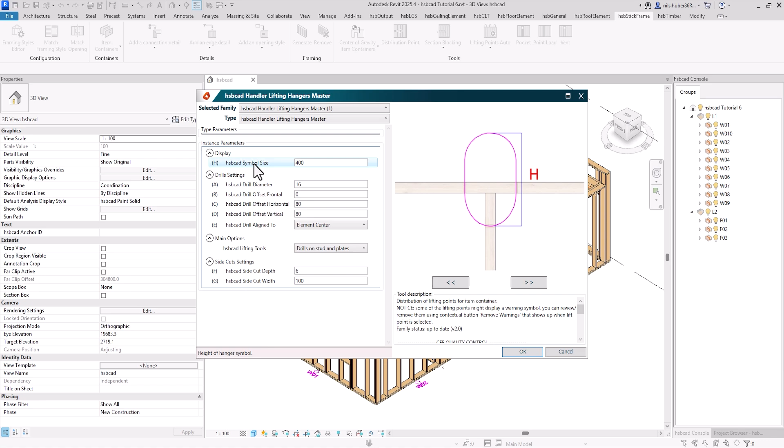So in the Setup tab, you can at first change the symbol size. By clicking on each parameter, you get a visual display of the parameter on the right side. We'll leave the symbol size as it is. The drill diameter defines the diameter of the drills. The frontal offset is the offset of the drill from the alignment.

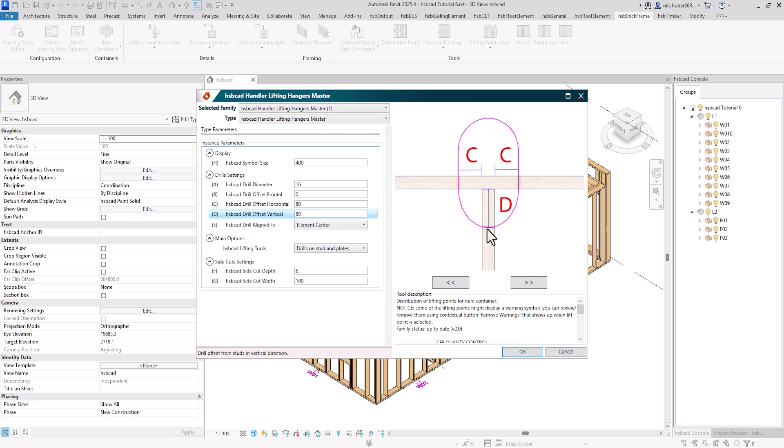The horizontal offset of the drill is the offset from the edges of the stud in the top plate. And the vertical offset is the offset of the drill and the stud. And this offset starts from the lower edge of the bottom of the top plate and goes down in the stud. Furthermore, you can set up the drill alignment. You can either align it to the element center, to the beam center, or to the top plate center. We're using the element center for that one.

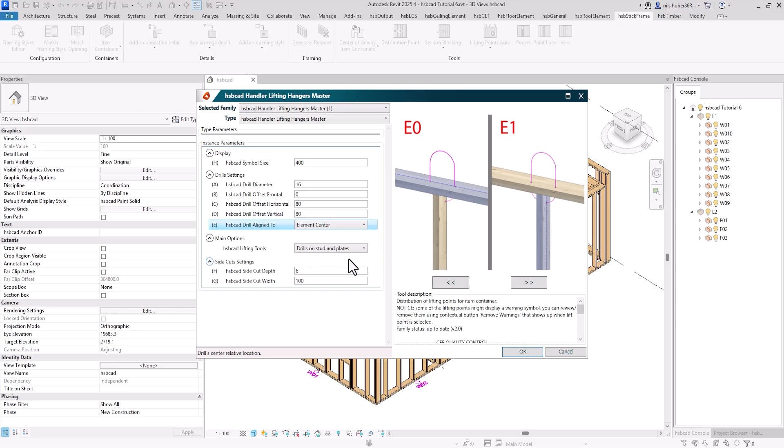On here, you have to select the lifting tools. You can either have drills on stud and plates, you can have a drill on the stud only, you can have cuts on both sides of the plates, or you can have no tooling at all. Right now, we're using drills on studs and plates. As we're using drills right now, we don't need the cut setup down here. But you could set up the cut depth and the cut width.

After clicking OK, you're asked to select the item container for which you want to create the lifting points. So right now, we do it for that one. And after we select the item container, we click Finish. So as you can see, the lifting points have now been inserted as tools, as handler tools, but the drills haven't been generated. In order to do this, you have to select the item container and generate it. Right now, the drills have been added right here.

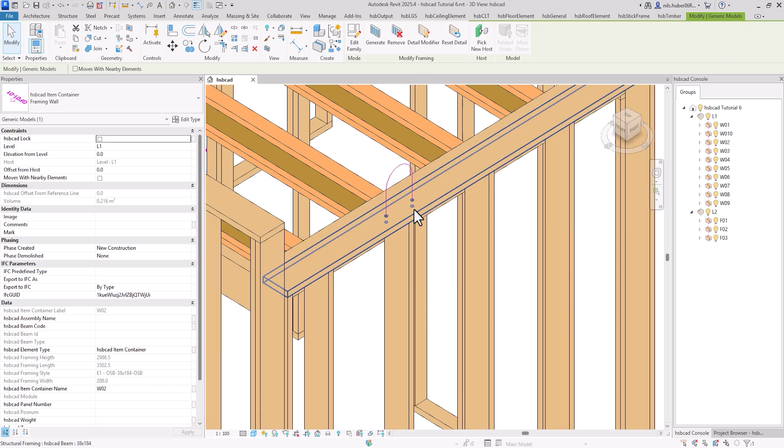When selecting the handler tool, you could move it and it will jump to the next stud. But as you can see, you would have to regenerate the item container in order to get the drills visible. So we regenerate it. And as you can see, because we have no handler tool here, the drills are gone and moved over to that point.

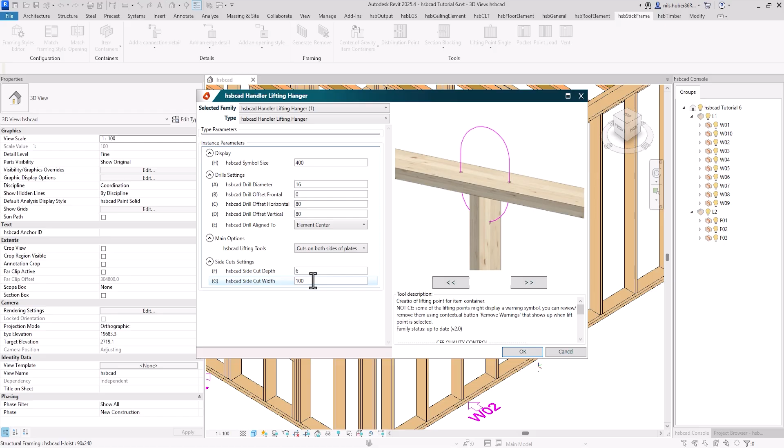You can, furthermore, add single lifting points. For this one, we'll use the cuts on both sides of plates. We're using a cut depth of 6 mm and a cut width of 100 mm. And after clicking OK, you need to select the item container, and afterwards, the location.

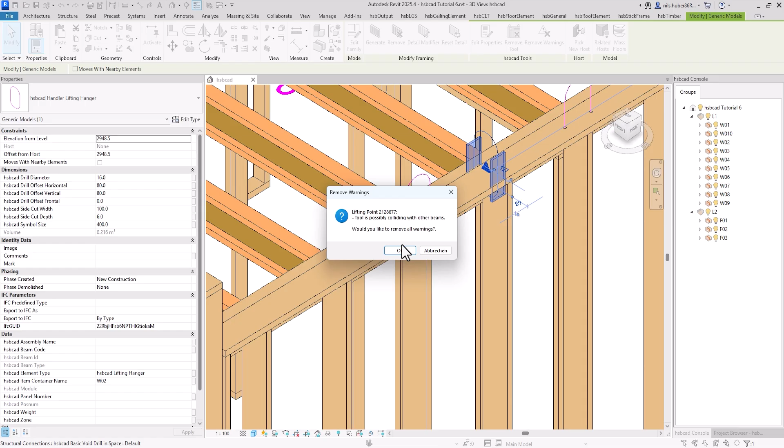So as you can see, right now, I'm getting a warning here. So when I select this handler tool, I can click on Remove Warning, and I get what the warning is about. So we're possibly colliding with other beams. That makes sense, because we are having cuts, and we placed it on top of the stud. So after clicking OK, the warning is removed.

And I can move it over here, so we don't interfere with the stud. Afterwards, I have to regenerate the item container again to get the construction. And right now, we're having cuts on both sides of the top plate.

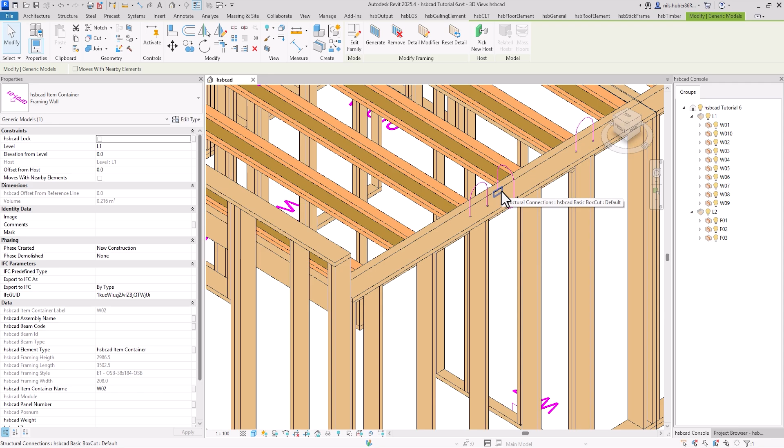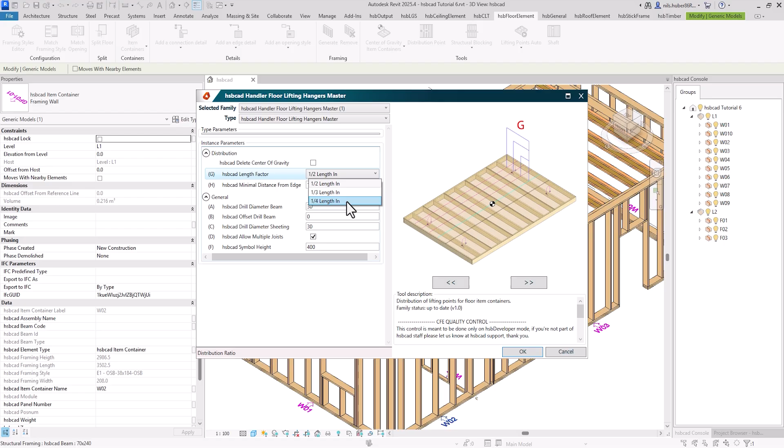You can also use the same tool for the floor elements. So we want to use the auto lifting points. And in here, you have a few different parameter options. You can delete the center of gravity. You can set up the length factor. The length factor starts in the middle of the floor element. And you can choose between half of the length, 1/3 of the length, or 1/4 of the length. We're using half of the length. And you can set up the minimal distance from the edge. We're using 100 mm for that one.

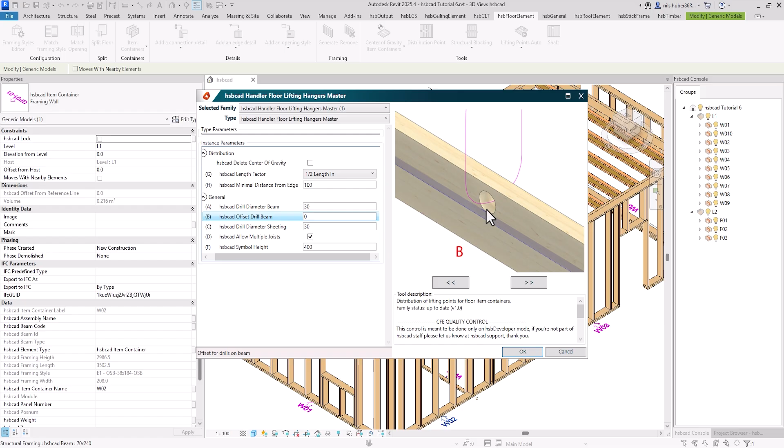Next up, you have the drill diameter in the beam. And you have the offset of this drill. The offset is from the middle of the beam upwards. Furthermore, you have to set up the drill diameter for the sheeting. We're not having the sheeting visible in this one right now, but you can do it. And you can allow for multiple joists down here. And of course, you can also set up the symbol height.

After clicking OK, you're asked again to select the item container of the floor, and afterwards you can click Finish. So, the handler tools have now been inserted, and in order to get the drills, you have to regenerate the item container. So, right now, we're having the drills in here.

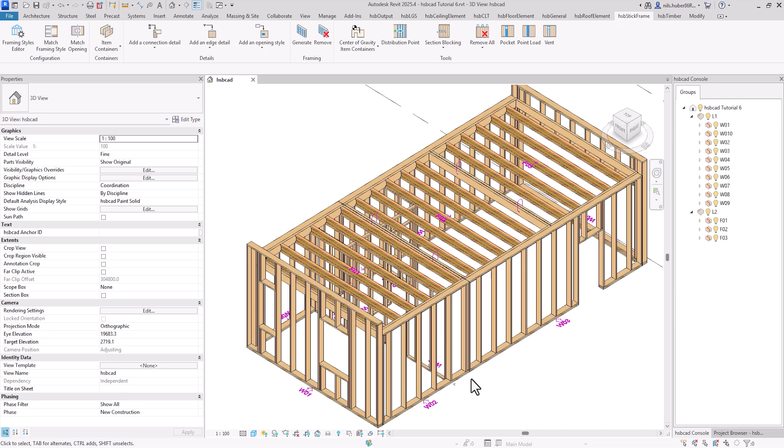When we go back to hsbStickFrame, we can use the Remove All tool and select this item container. Afterwards, click Finish. And as you can see, this is not only removing the handlers, but this is also removing all of the tooling that has been applied to this item container.

I hope this hsbDesign for Revit tutorial helped you get an introduction to the lifting point tool.